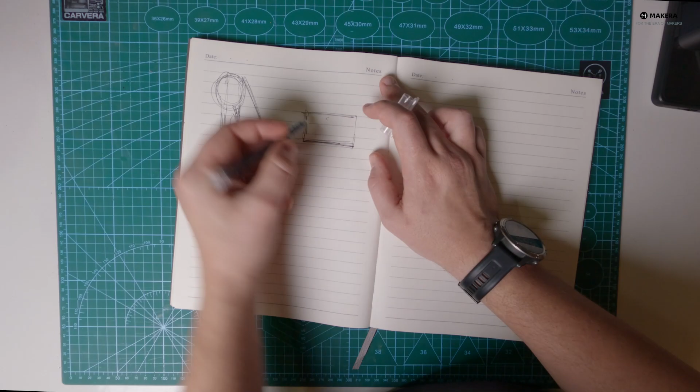So here I'll just start by going through some inspiration pictures on Pinterest just to get the idea. Then I'll start sketching out some designs just roughly, measure some materials, get some rough dimensions, and then set this up for the 3D design software.

Next I'll model this up in the 3D software. The software that I'm using is Rhino 3D. And then I'll just export these files so I can import them into Fusion.

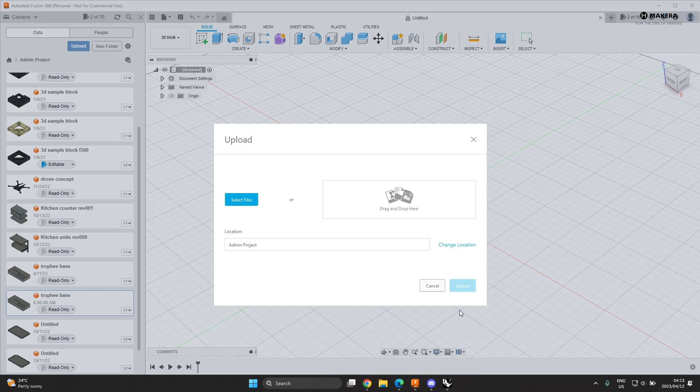So we're going to do the base in Fusion. So first thing to do is just to import the file. I've already uploaded it here. You just select that, select the file and upload it to the software. And that's already here, the trophy base.

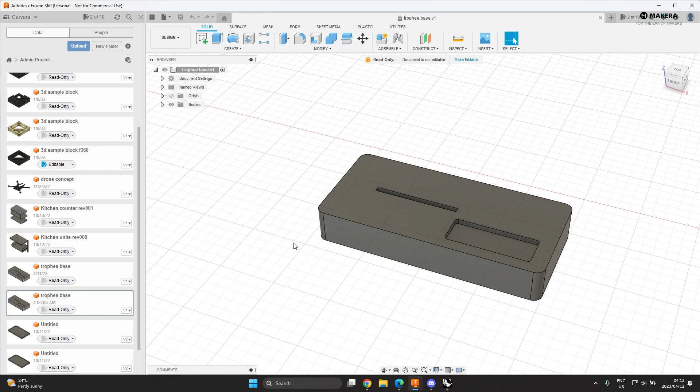Okay, so this is the base that we'll be milling. It's a very basic base. We'll do an adaptive clearing of this area over here. We'll do a slot cutout for just this slot, and then we'll do an outside cut of the outside and then add some tabs. So first thing to do is just to set up your job.

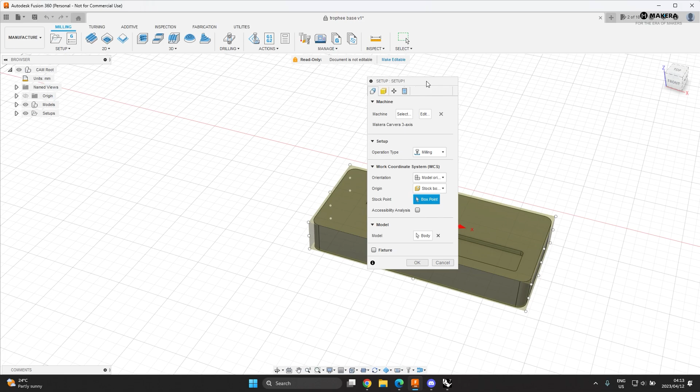So I'll first go here to setup. Now we're going to use the Carvera 3-axis profile. If you don't have that, that's available on our website for download. We also have the 4th axis also there. We'll do a milling operation, and now the WCS system, the work coordinate system, we will use the model orientation as it is at the moment.

I will select the origin as the box point, which is that area over there, and then the model has been selected. If it's not selected, then you just have to add the model to this so it knows what it wants to cut. Next we will do the stock.

Now I already have my fixed size stock. You can also do an offset if you have a large piece. That's also fine. So I know that my width is 150 millimeters by 75 millimeters, and the part is 20 millimeters, and the stock is also 20 millimeters. So that's done on this tab.

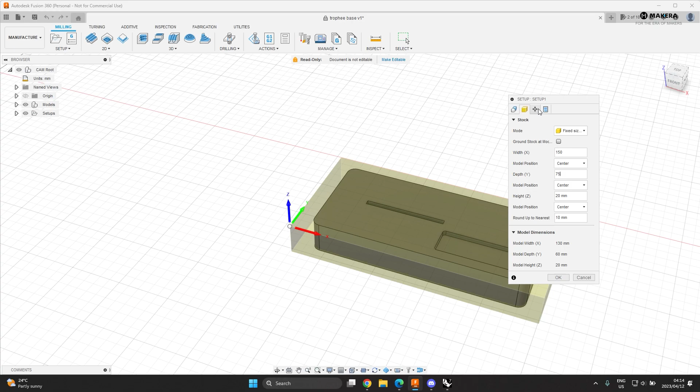Then we'll go to the next one, which is your part positioning. Now we'll keep this in the center of the stock that I've just allocated, just to make sure that there's enough space surrounding it for the bit to run.

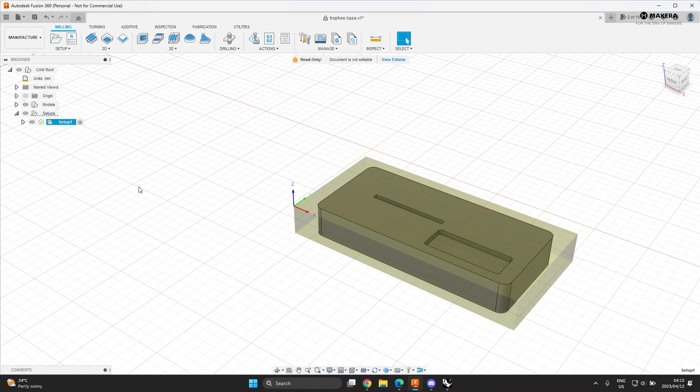And then the last thing is just the naming convention, program name. You don't have to modify this. If you do a lot of projects and cut files, then it's worth naming them in a fashioned order. So I'll just hit OK. Now that's set up. Now we'll start with our first operation.

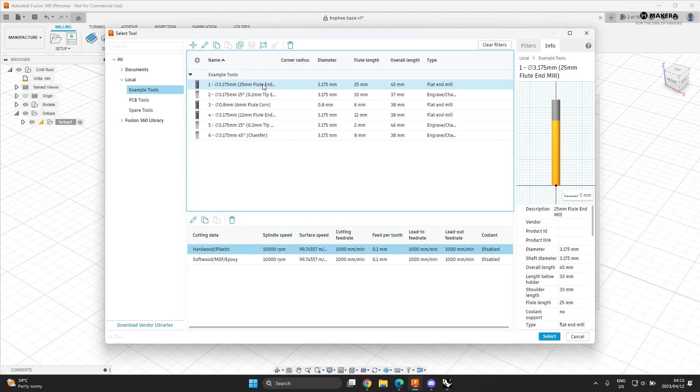So we will do an adaptive clearing on this area. So I'll just select that chain to the bottom there. First of all, we'll select our tool. Now I've already uploaded the tools that are available for download also off the website. So I'll be using the 25mm, and I will be doing plastic. Hit select. We do not have to use any coolant for this, that's fine.

These parameters have already been set up for the specific material and the specific bit, so you don't have to modify that. We go to the next tab, machining boundary. We've selected that curve at the bottom. That's the contours, that's been selected.

Now we just go to check the bottom is at the bottom of the part. The top is at the top of the part, and then you've got your retract clearance and your overall clearance, which is 15mm. So we're happy with that. Everything is set up here correctly. Let's go to the next tab.

We are not going to leave stock here because we wanted to cut to that surface. So I'll unclick that stock to leave option, and then we'll go here to the passes, optimal load, 2mm depth. So we'll keep it that way. We don't have to modify anything else here.

Direction, climb, inside climb, that's fine. I usually use climb for inside cuts and conventional for outside cuts. That's just through my experience. And then the last thing is just the linking. We don't have any linking needed for just this part because it's a single part. So we'll hit OK and we'll wait for the path to generate. It gives you a little percentage here on how long it takes.

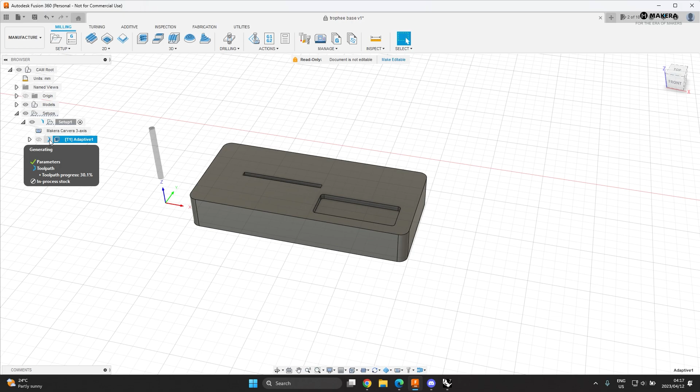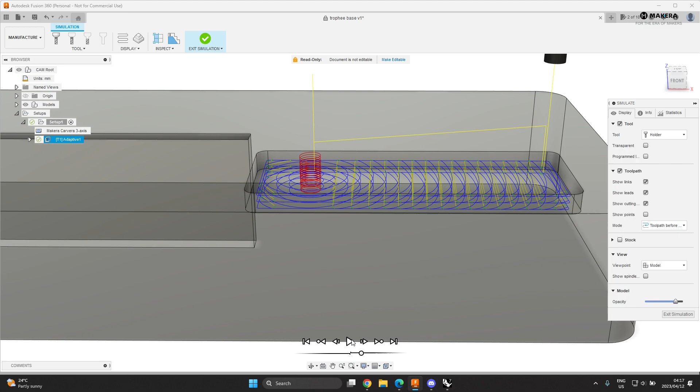And there you go. So that's 3 passes on this hole. Let's just simulate that. Right click on that, simulate. Let's see what happens here. Let's just slow that down a bit. Let's do that again. Okay, so it'll come down. It will drill down into the material and then start with the first pass.

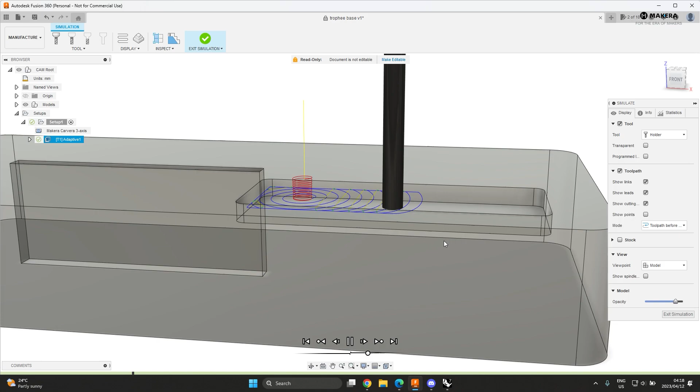This is why I like the adaptive clearing, because it puts less strain on the bit than you would with just normal clearing. So I'll just speed this up a bit. So that's 1 pass. We already set the depth per pass to 2mm. So then it will cut a second pass and then a 3rd pass to the bottom of that surface.

If we selected leave stock, you'll see that this bottom profile won't cut to that surface. The amount that you've allocated at leave stock will still be left over here. So we want it to cut to that surface, so this is what we want. So we're happy with that. Exit simulation. Let's go to the next part, which will be the slot.

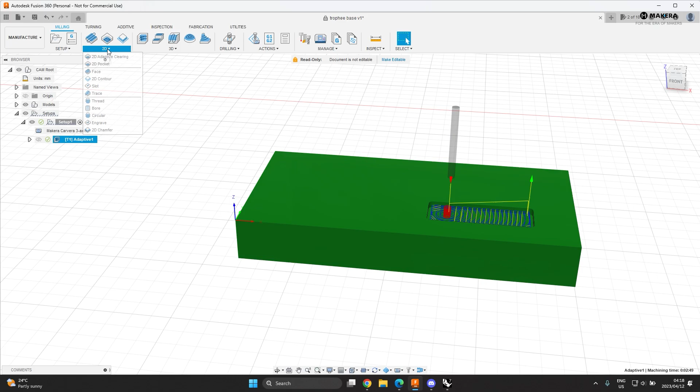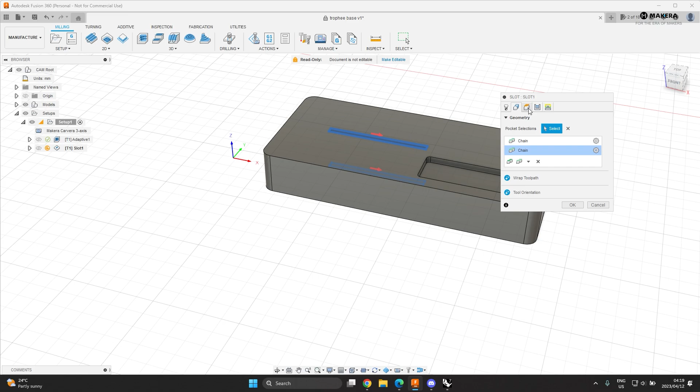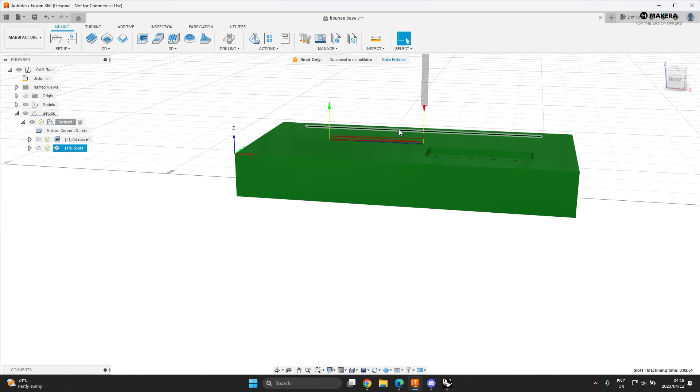And then we'll go to the passes. And we'll say here again, multiple depths at 2mm. Hit OK. Let that simulate. Just go back here to the selected contours. Let me remove this contour so it actually uses the bottom as a reference. Hit OK on that, and that still doesn't cut. It does.

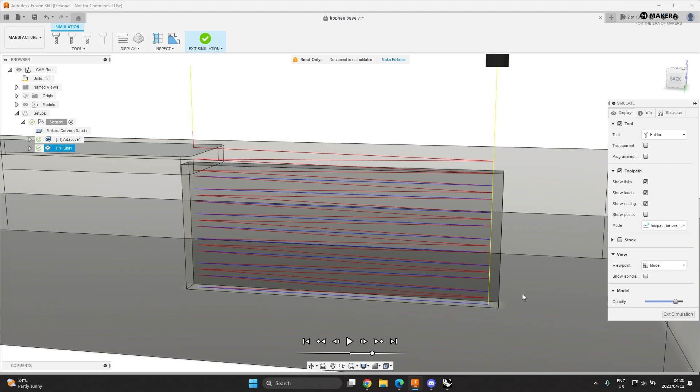You'll see it zigzags down into that material. Let's just simulate this. See what happens. So it zigzags into that material, to the bottom. You can see it's cutting to the bottom there. So I don't see any problems there. That seems like a good profile. Exit simulation. And then the final thing that we'll do is the 2D contour, which would be the outline cut, which is that line over there.

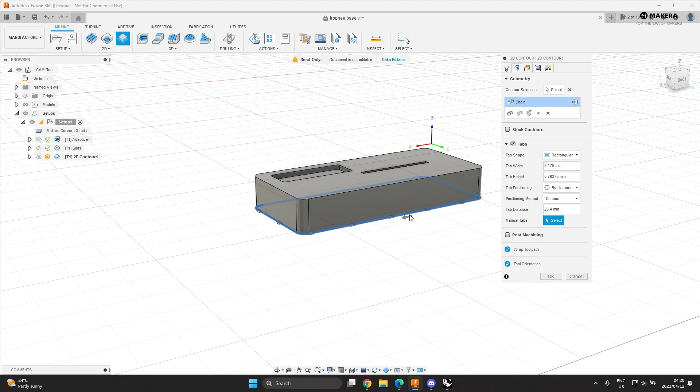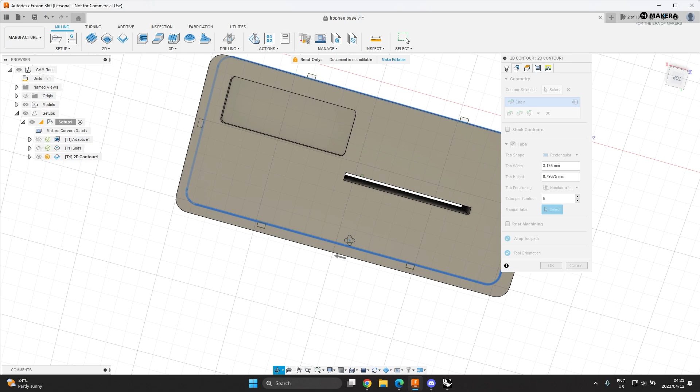Rectangular, number of tabs. How do I remove here? Just control click to remove. Contour. I think 6 will be a good number here. The size of the tabs you can just put on here. I'll give it a little bit more height, 1.5. You see they increased slightly, a little bit bigger.

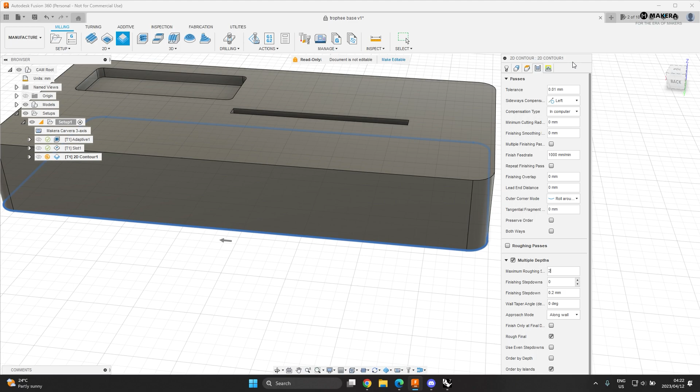Tab width, that's fine. Let's go to our height. You can have a look at everything here. Retract height 5mm. Everything runs over the part, so there'll be no collisions there. Passes, we'll say multiple depths here, and then maximum roughing step down. We'll call this 2mm, and stock to leave we don't have to select because we want it to cut right through. And then we'll hit OK.

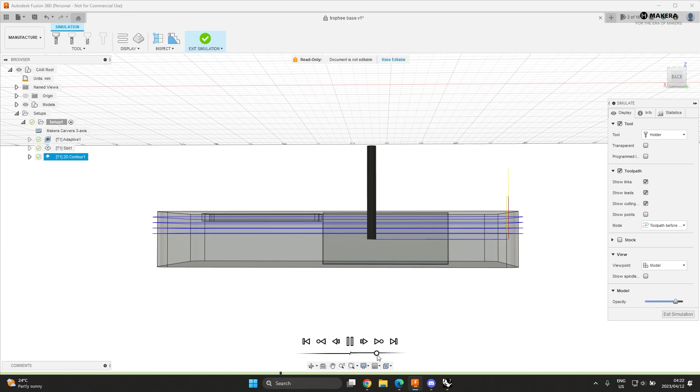Let's wait for this to simulate. And then we go to simulate. And then it runs outside. And you can see the tabs have been left. Everything seems good here. Exit simulation.

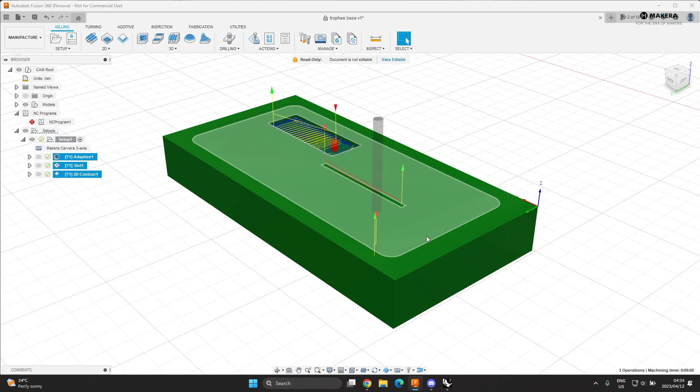Okay, so now we're just going to export this. So I'll select these 3 files. That's the outside contour, that's the slot, and the pocket. We'll hit NC. We'll call this trophy base. I'll output it to the desktop. Post.

Let's just go have a look at this then. Trophy base. And there is our file, adaptive milling 1, which is the pocket. And then we'll go to the next profile, and the next profile. Everything seems to be worthy here.

If you have different tools, an easy way to just combine them is just to Control A, select all of these, and then just copy and paste the 2 files together, and that will automatically create the tool change for you. And then you just have to check that the right tool is selected if you're doing your tool changes. So let's get this running, put this on the machine, get the stock on the machine, and start cutting.

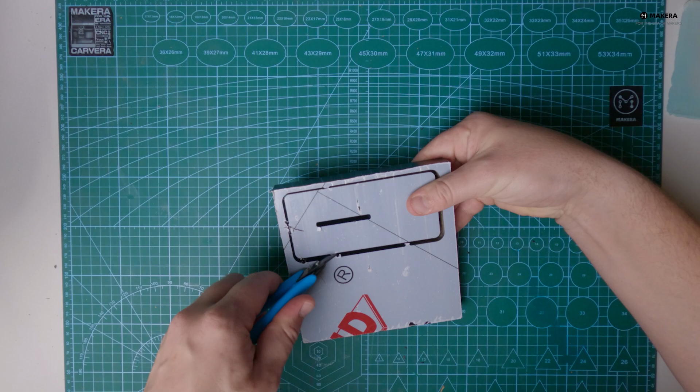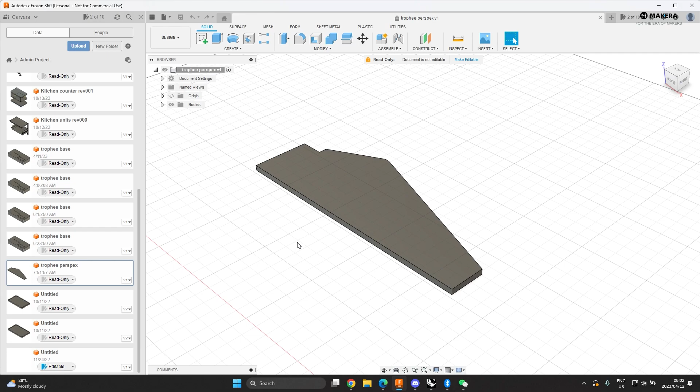Next we'll do the upright perspex. So I'll just go find and upload our perspex. Alright, so there we go. Let's start to set this up. We go to manufacture, and we're going to set the stock up first.

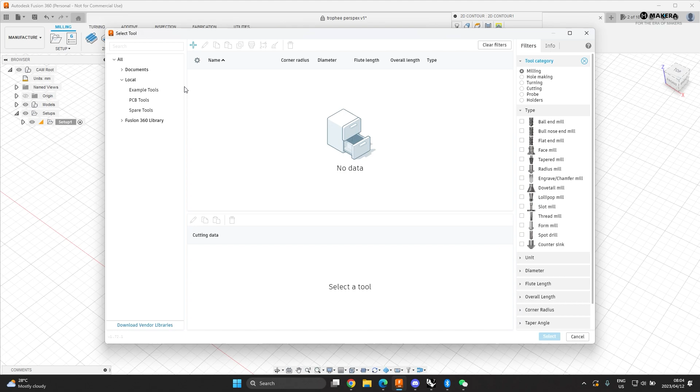And then the only thing that we'll do here is a 2D contour. So we will select the bottom profile. We'll select our tool. I'll use the 3.175mm, 1/8 of an inch. I've got that selected. I'm actually going to add a few tabs here.

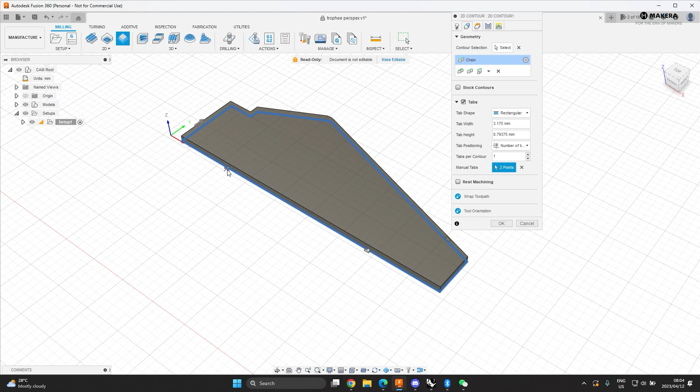So I'll just go here. I will put tabs in manually. Let's put one over there, one over there, one over there, one over there. And then we go to geometry. I'm going to set the bottom height to -0.5 just to make sure that it cuts through the material.

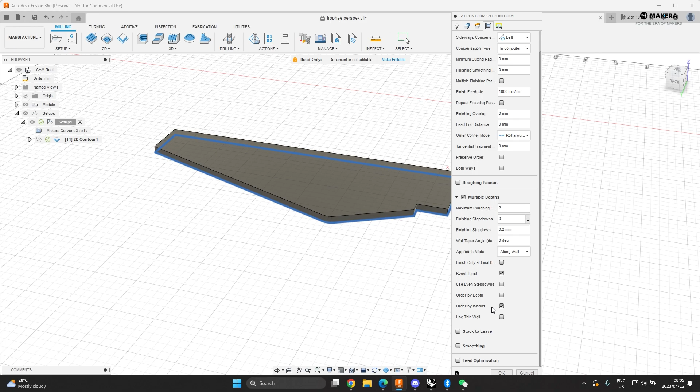And then I will do multiple depths, 2 mil per cut. We don't have to leave any stock. Hit OK. And let's see what this does. That is what we want. So we'll just select this 2D contour cut. We'll go to NC program.

We'll call this upright trophy perspex. We'll save that and we'll put it on the machine.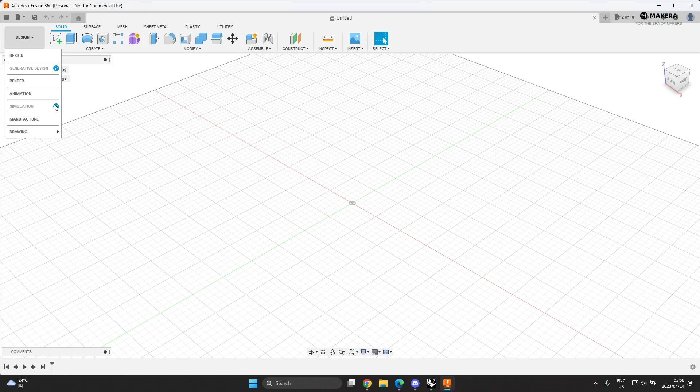So for the wooden upright base, we're going to start with importing our file. So we'll just go here to the project folder, and then we're going to upload, go find the folder. Upright, upload this. Okay, so we close. Then we go find the wooden upright, which is over here. Double click on that. Now that's the piece we are cutting.

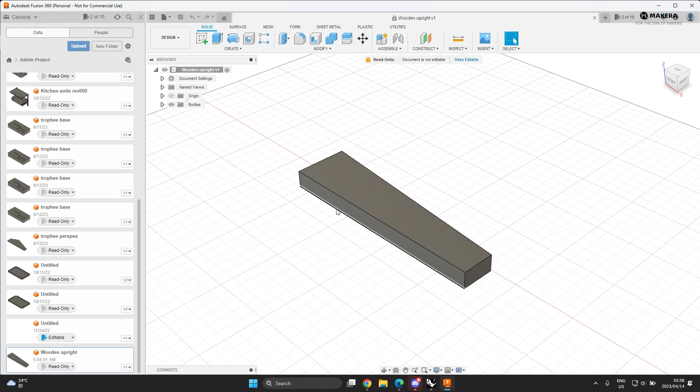What I'll do here is first we'll just go to manufacture and start with the setup. Now we are using the Makera 3-axis machine. We are doing a milling operation. We're going to use the stock box point, which is that corner there, and then we've selected the body to be cut. Then we'll go to the next one.

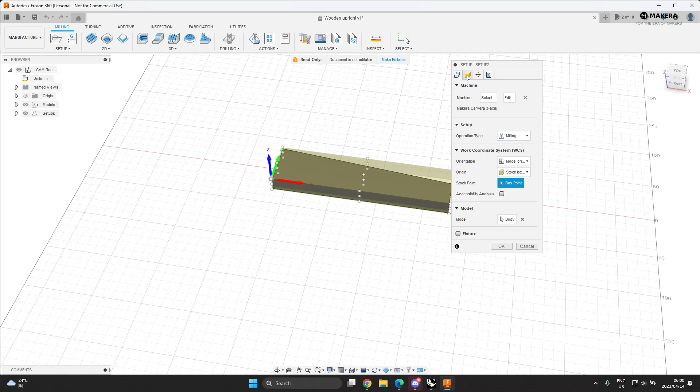Now I've already measured the stock. My width is about 190, but I'll just put in here a little bit more than what it is. So I'll go to 210. So it's got a 10 mil there and a 10 mil on this side. And then model position, and the width is center, that's fine. The depth is 50, so I'll just increase that slightly, go 65.

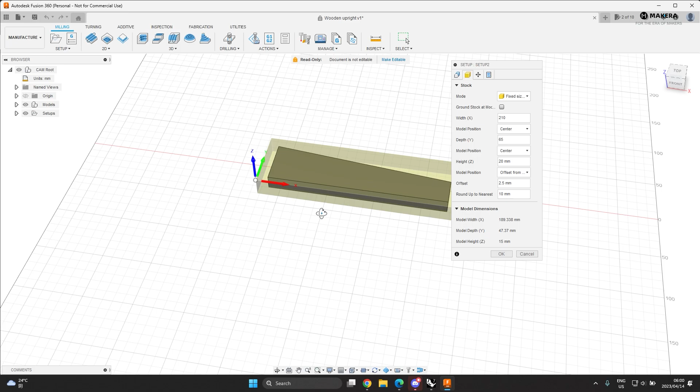Model position would be center of that, and the height that I'm cutting this to is 20 mil. And this we want to be at the bottom of the stock. No, sorry, my stock height, this is wrong. The stock height that I've got is 32, but I'm gonna cut it to 20 mil. So then we'll do an offset 0, so it's at the bottom. So it's actually gonna be milling this whole section at the top here until we get to this face. Okay, so that's set up.

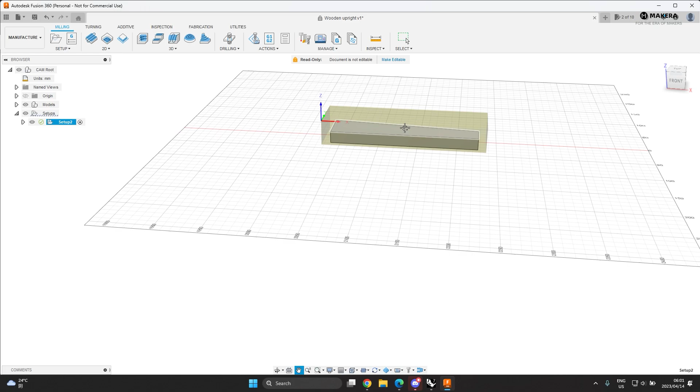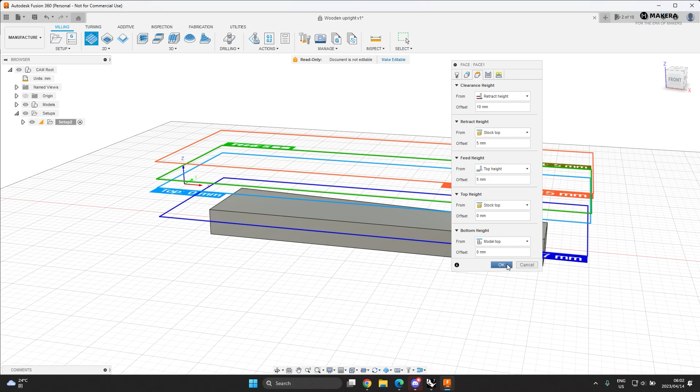We will just double check if everything's correct here. So the top of the stock is sitting there, and the bottom is over there. The bottom of the cut will be till there. So let's just hit OK on that. Then you'll see it's going to mill down until that top face. So that's the first operation we'll do.

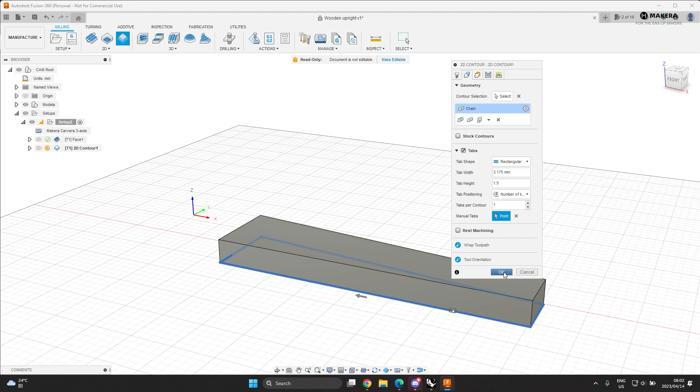And then secondly, we'll do the 2D contour cut, which would be to this bottom curve over here. We are going to add some tabs. I'll do this manually. Number of tabs, manual tabs. I'll put one over there. I need to just increase this height slightly. I'll go 1.5. Add one there. Add one there. Add one there.

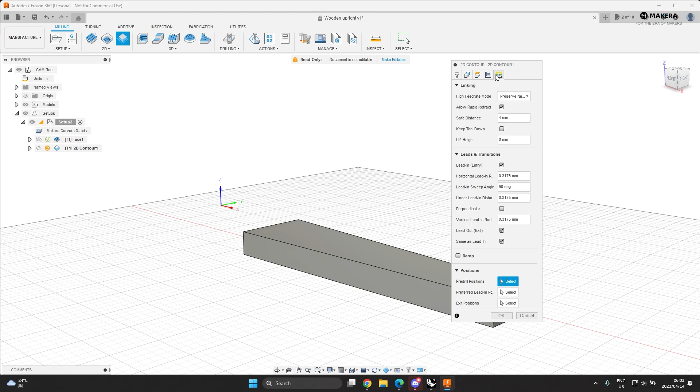Let's just check the heights that we have here. The bottom is the bottom of the stock, that's fine. And then here we're going to go multiple depths, and we'll be cutting at a depth of 3 millimeter per pass. Stock to leave, no. Passes, tolerances, this is all fine. We don't have to link any other operations to this.

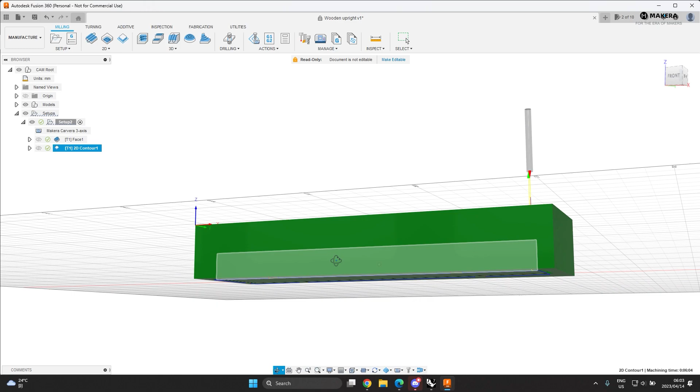I'm just gonna say bottom height here from the selected contour. I'm just gonna go a little bit deeper. So I'm just gonna go minus 0.5, so it actually cuts past the Z0 into the stock material. And then we have our tabs still there, so that will hold everything in place.

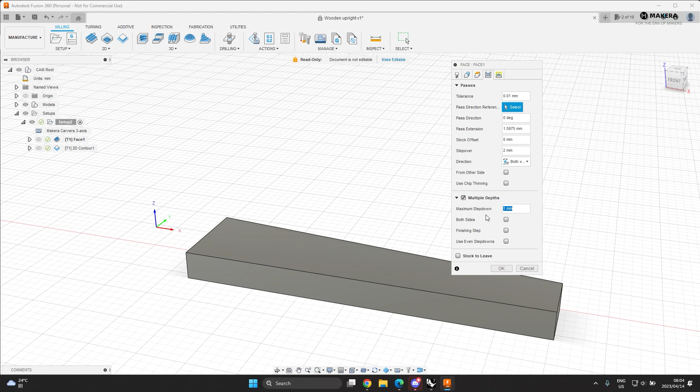One thing on the facing operation, it's doing a single pass. So I just forgot to go here to multiple depths, and we are milling at 3 millimeter per pass. Hit OK on that.

Let's just hide this one. Let's just simulate this just to check if this is working. I'll enable stock here, and then we'll cut at the top. It'll go zigzag, down, and then down until that face, and then from there we'll do the outside cut.

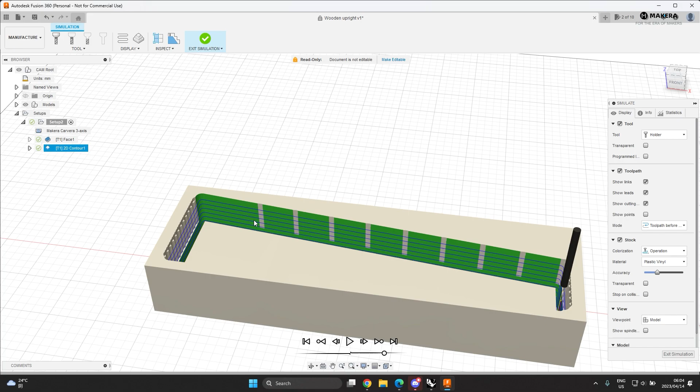And that is exactly what we want. Let's save this and then we send it to the machine. So exit simulation, select both of these, NC program, I'll call this upright. Post.

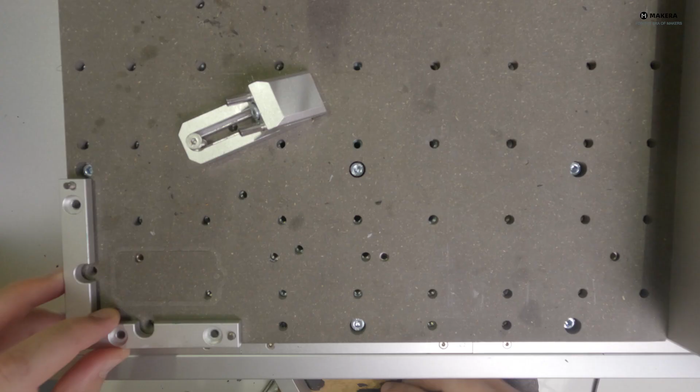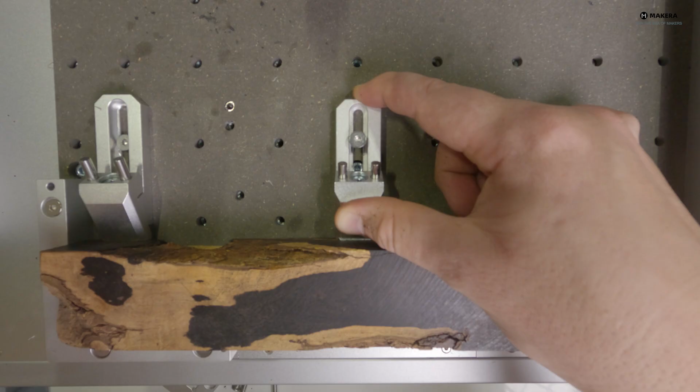So here I started mounting this piece of wood, which I think is ebony. I've never had experience with cutting this wood, but it's a very hard wood, and this is how the machine reacted. But you can listen to the sound that the machine makes here. And I obviously knew something was wrong, but I kept on recording just to show you that this bit is under strain. So I actually had a bit break here.

So this just kind of shows you what the machine will sound like when it's under too much pressure, and that you have to change the parameters of your cut. I moved on to a piece of maple for the same cut, and here you can see some footage of a good sounding operation.

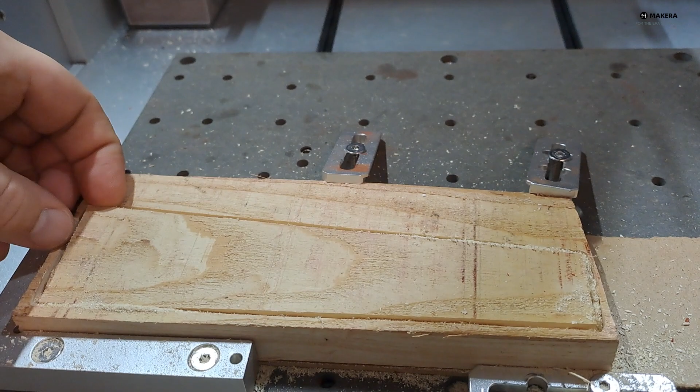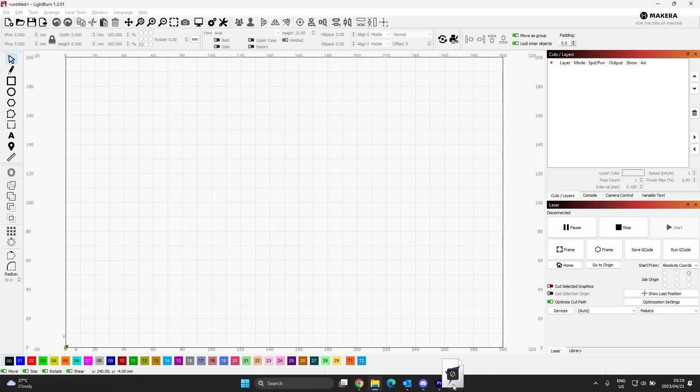So to get started on the laser cutting, first thing I'll grab is just the outline of the wooden upright part that we're going to engrave. So I'll just drag that in here. And then I'll place this right in the bottom XY location in anchor point 1. So I basically just have to mount the material there. And then I'll write some text. So this trophy is the most improved. Good spell.

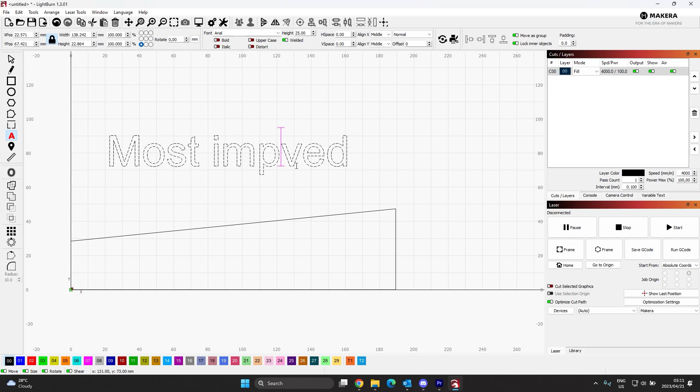Scale this down slightly. If you drag it from the corner, it automatically scales. If you want to adjust the scale, then you hold shift, then you can push and drag it as much as you want. So I'll keep it that way. Then I'll go grab the logo that I'm putting on here. Harps, that's a team. I'll rotate this, so this is now the bottom. Hold shift just to snap it into grid.

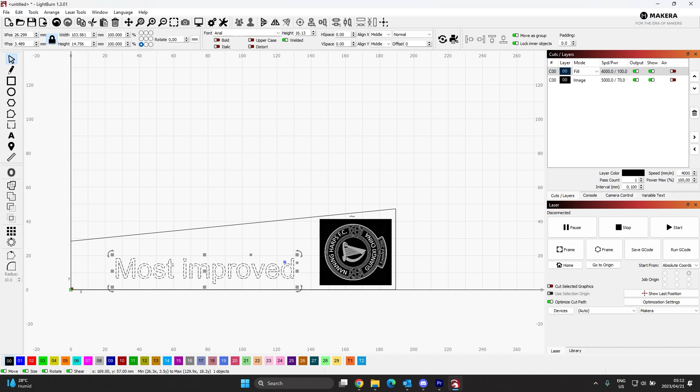Seems good to me. Now this text can be set to either line or fill. Now I want to fill this because I want all the letters to be engraved on the inside of it. If it's a line, it'll just do the border of the letters. So that's been set up already. I'm going to do the power at 100%. We don't have any air, so I'll take that off. And then this picture, I'll just go to adjust image.

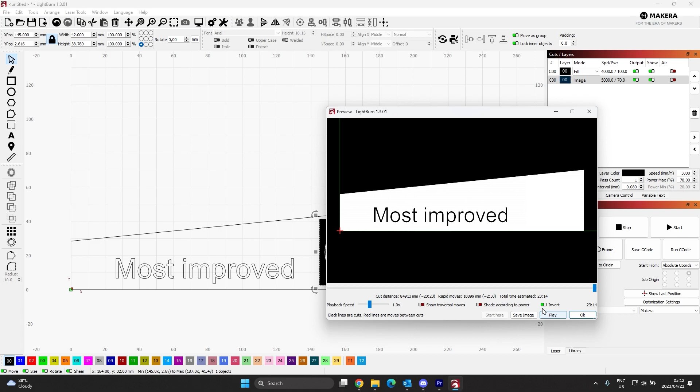So I'm not going to invert the display, but if I go here and I say preview, not inverted, so we have to invert. We want to engrave that black. So at the moment what's happening is it's reading this outside borderline as well. So this is basically just a guide. So I'm actually going to delete this now. So let's preview this again. Because I said fill, that's black, so that's going to be engraved, the full letters and the inside of the letters.

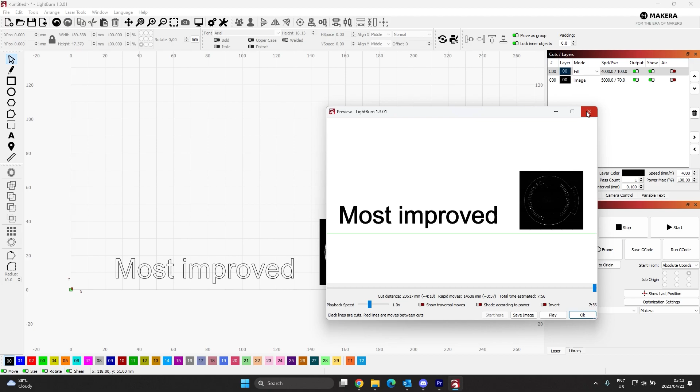And then this I need to adjust now, so I have to invert this image. So I'll do a negative image of this so that the lines are black. Hit OK on that. Let's say preview again, but I'm not inverting this. So that will be all engraved, and then the logo will be engraved like that. I'm setting my image engrave to 70%.

Doing it at 100% on these fine details took away a little bit of the details, but you can see that seems quite well. There are some lines here, but I'm not too worried about those because I'm going to give it a little sand afterwards. So I'll hit OK. We'll save this G code, send that to the machine, and then get this started.

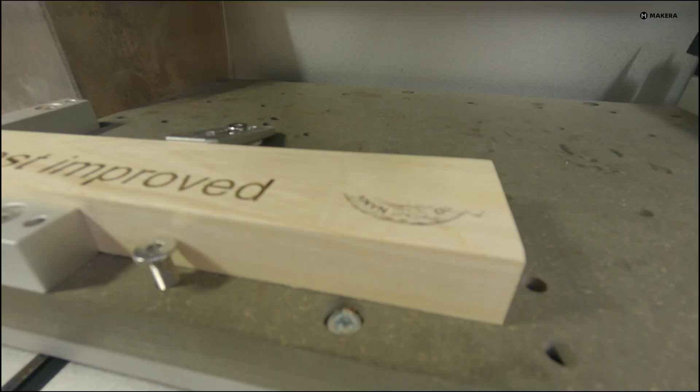So to finish it off, I just had to sand all the parts a little bit and then assemble them. I used some glue and some double-sided tape, and then I finished it off by 3D printing a little football for the top, and I just glued that to finish off the top of the trophy.